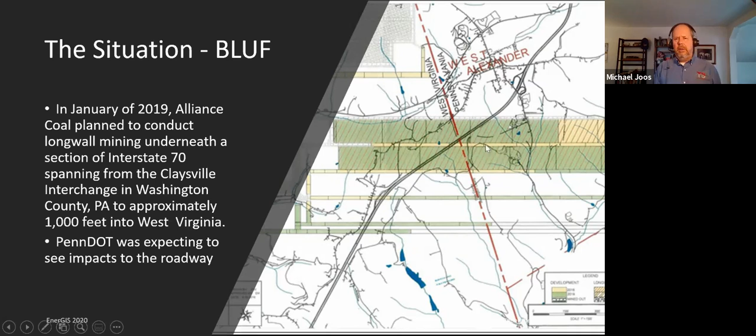And with this longwall mining activity going on underneath the interstate, of course, PennDOT was expecting to see significant impacts to the roadway surface. If we look at the image in the right-hand portion of our slide, this is Interstate 70 coming down from the northeast and proceeding to the southwest here. It does, in fact, cross the West Virginia state line right here. And the shaded green areas are referred to as longwall panels, and I'm going to touch on them in our next slide here, give you a little better understanding of what's happening there.

So longwall mining, which is the principal method of extraction that Alliance Coal uses in the Tunnel Ridge mine, they cut these longwall panels underground, and they're typically 1,200 to 1,400 feet wide, about 10,000 feet in length, and they are generally between 300 to 1,300 feet underground.

As they are cutting that longwall face forward, they have hydraulic roof supports or shields in place to protect the miners. And as the longwall face advances, the shield moves along with it. So what happens is the roof in the mined out sections behind the shield begins to collapse as those shields are moved forward. And that's where we see the impacts on the surface then.

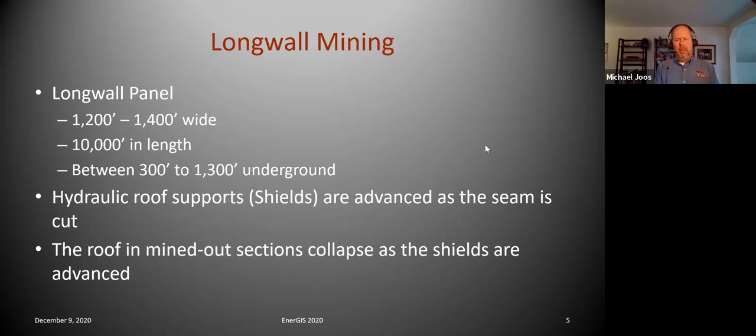Interstate 70 is a very heavily traveled U.S. interstate. If you're not familiar with it, it runs east to west from just east of Baltimore, Maryland, through the Rocky Mountains and terminates in Cove Fort, Utah. The annual average daily traffic, as I mentioned, very heavily traveled roadway, is about 34,000 vehicles a day for the particular stretch of highway that was involved in this project.

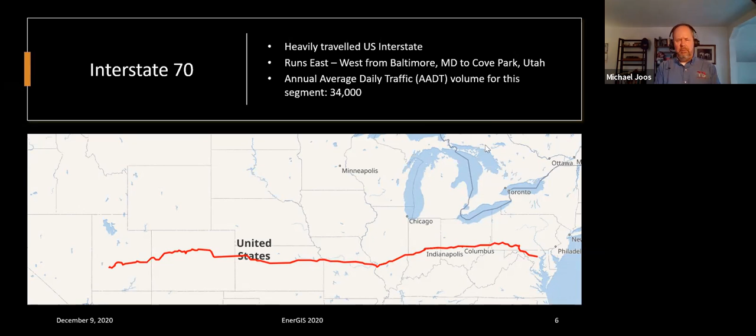The players at a very high level that were involved: the Pennsylvania Department of Transportation, District 12, again, they were our client. A gentleman by the name of Roy Painter was PennDOT's technical advisor. They brought in the University of Pittsburgh as a research contractor. Their principal investigator was Dr. Anthony Iannacchione. We coordinated very closely with Dr. Iannacchione throughout this project. And then finally, Alliance Coal, who owns and operates the Tunnel Ridge Mine.

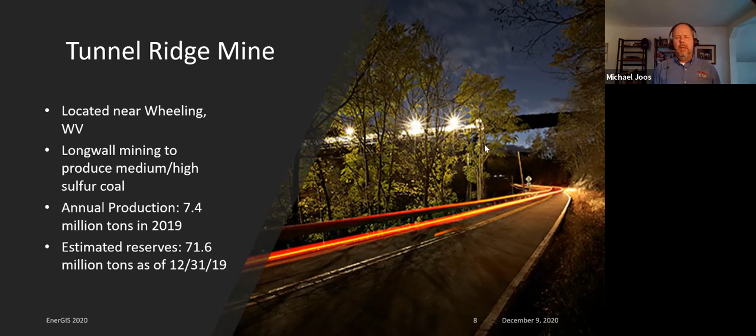A little background on the Tunnel Ridge Mine. This is one of several mines owned and operated by Alliance Coal. This particular mine is located near Wheeling, West Virginia. Longwall mining, again, is their principal method of extracting coal to produce medium and high sulfur coal. This is a significant operation with annual production of 7.4 million tons in 2019, and they have estimated reserves at the end of the year 2019 of 71.6 million tons. So still a lot of mining to do here at this particular mine.

The project timeline for panel 15, and that is the longwall panel that was going underneath I-70. They started panel 15 in November of 2018. They started under I-70 in January 2019, right around the beginning of the year. They finished under I-70 near the end of February 2019. So they were actually underneath the highway for about 2 months. And they did a full retreat, where they bring all the equipment back out of the panel, in May of 2019.

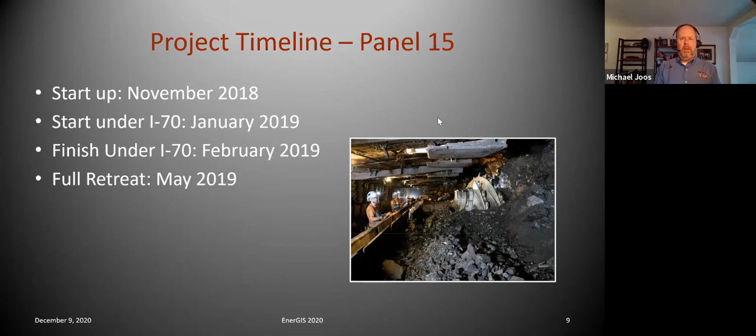PennDOT's objectives in this project, one of the reasons that they brought us on board for this, was to investigate the influence of longwall mining on highway alignments and associated slopes and embankments. So not just the road surface, but the slopes and embankments also. They wanted to evaluate how the highway deforms during the undermining. They wanted to utilize models to better understand subsidence impacts to highway alignment and better determine how highway alignments could be impacted on future projects.

So if you look at those last two bullets, you see that not only did they want to understand what was going on with this particular project, but they also wanted to have some really solid data to do predictive analysis on future projects, because while it's not something that happens very often, where mining is going underneath major interstates, it does happen from time to time. And in fact, it did happen here in Western Pennsylvania not all that long ago when longwall mining was conducted under I-79.

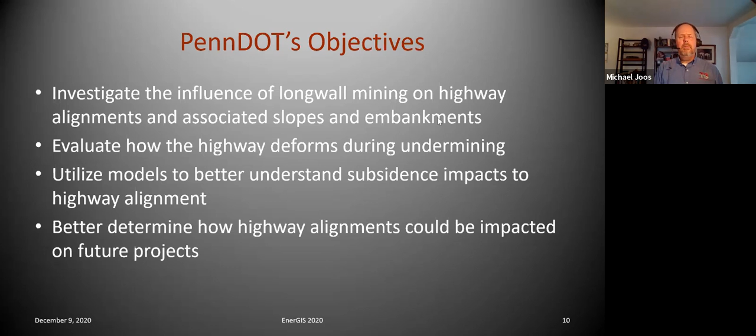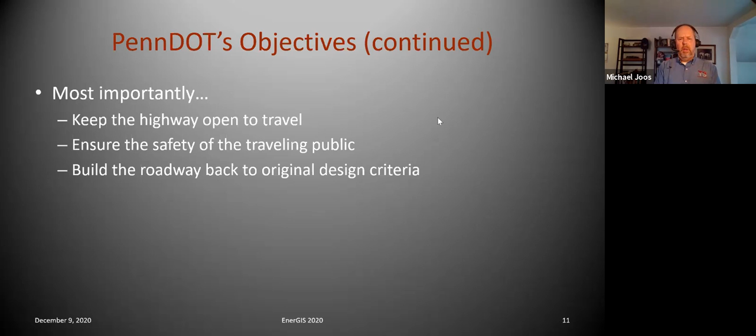Continuing with PennDOT's objectives, they also, and perhaps most importantly, wanted to keep the highway open to travel. And this is, to us, I think, one of the most fascinating aspects of this project. That stretch of highway, as I mentioned, 34,000 vehicles a day. They were expecting significant impacts to the roadway, but they wanted to keep the highway open to travel while this was going on. They also wanted to ensure the safety of the traveling public and then build the roadway back to the original design criteria.

PennDOT's expectation going into the project was that they would see settling in the vertical axis of between 2 and 5 feet throughout the time frame that they were underneath their mining. Also looking for horizontal deformation from compression, pushing together, and tension, pulling apart. And another interesting aspect was that they would not see the impacts of the longwall mining for about 1 full day behind the longwall face, or about 150 feet behind the face. So as the face of the longwall panel was advanced forward, they would not see the effects of that on the surface for about 1 full day. So I thought that was kind of interesting as well.

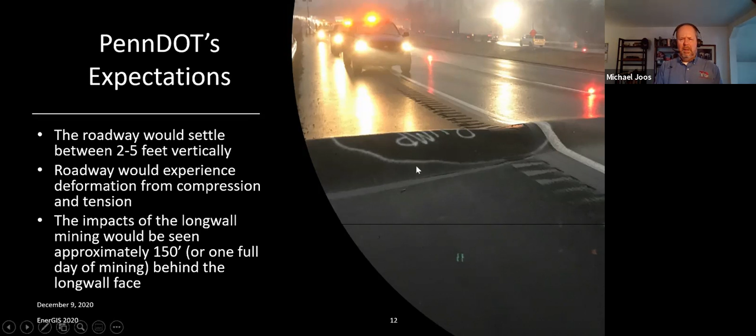This image on the right-hand side is one of my favorites when you're looking at some of the impacts to the roadway and this vertical roll here. We often see signs on the highway that say bump, but we've probably never encountered anything like this. It's easy to imagine that being well over a foot difference between the roadway surface and that roll.

As you can well imagine, this was news. It did not take a lot of digging on Google before we were finding all kind of newspaper articles and television news stories. And it was news not only because of the impacts to traffic and people's commutes and all those kind of things, but just simply because of what was going on, the project itself, that there was major mining activity going on underneath this very heavily traveled interstate.

Some of the roadway disruptions, this is what was going on. This is what we were seeing on the surface. And this was happening pretty much 24/7. And PennDOT was out there. You can see the traffic in the background, but they were out there 24/7 making real-time repairs to the roadway to keep that highway open. Again, that vertical roll on the left-hand side. On the right side of the image, we can see some horizontal, and in this case, separation of almost 3 inches.

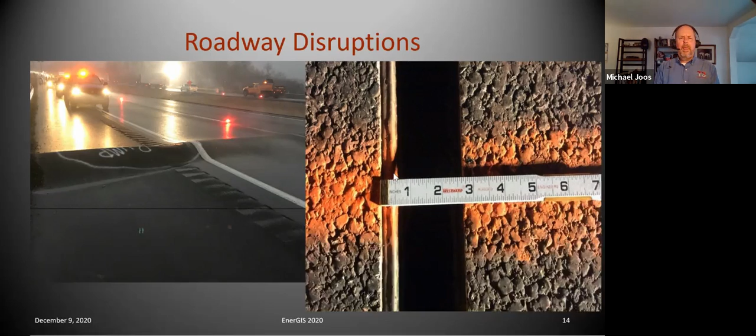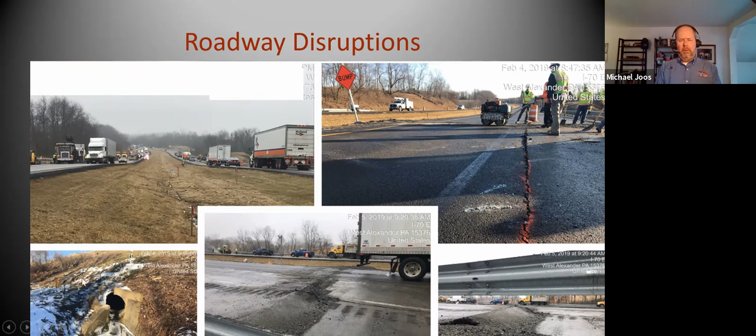Up on the right-hand side, we see some longitudinal cracking. Down here in the lower left-hand portion of the image, again, as I said, the disruption was not only to the roadway surface, but also to the slopes and embankments. You can see a culvert pretty much destroyed here. You can see difference in elevation from this section of pavement to the next. Over here, we can see cracking across the travel lane here in the berm, and of course, some very significant settling here in this image right here in the upper right-hand corner.

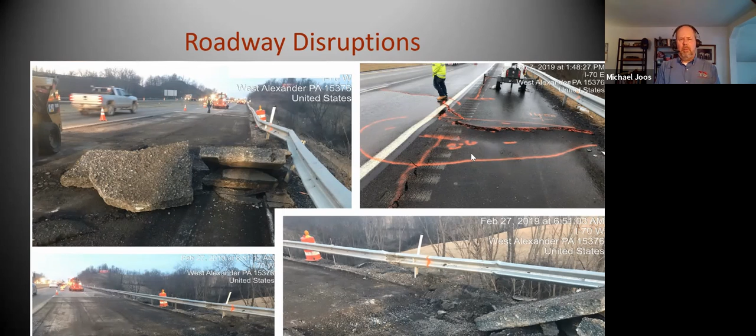So again, the roadway was being severely disrupted. PennDOT was out there taking care of these issues in real time, keeping that highway open to traffic. Pretty amazing. Our technical approach to the project was really driven by PennDOT's determination that mobile LiDAR technology blended with field surveys and photogrammetry from aerial imagery. So there's the data fusion part of this, is blending those different data sets to deliver the desired solution.

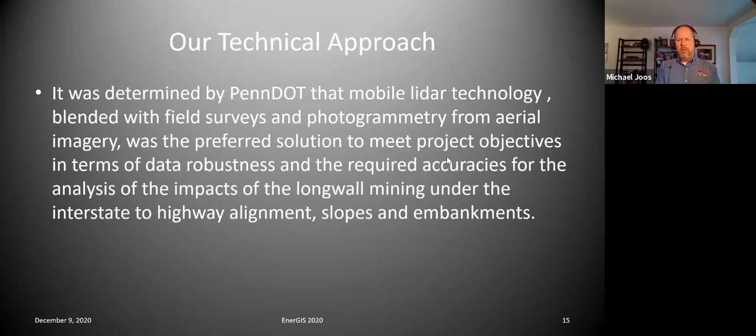But they determined that that was the preferred solution to meet project objectives in terms of data robustness and the required accuracies for the analysis of the impacts of the longwall mining under the interstate to highway alignment, slopes, and embankments. So with that in mind, we developed this technical approach, and just taking a quick look at it here, we established a primary control network that included benchmarks that at the time, and Marty's going to talk about this here in a couple seconds, we thought were outside the project area. We also established project control for the aerial imagery and mobile LiDAR.

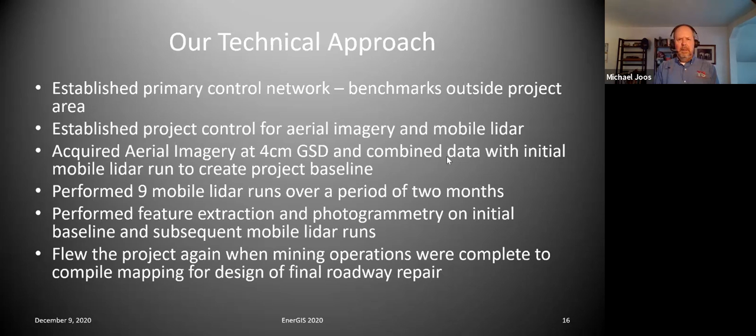We acquired aerial imagery from manned aircraft at a ground sample distance, GSD, of 4 centimeters. That's very high resolution, high quality aerial imagery, and combined that data with the initial mobile LiDAR run to create a project baseline. We performed 9 mobile LiDAR runs over a period of 2 months, performed feature extraction and photogrammetry on the initial baseline and subsequent mobile LiDAR runs, and then finally flew the project again when mining operations were complete to compile mapping for design of final roadway repair to bring it back to original design criteria. At this point, I'm going to ask Marty to jump in and talk a little bit more about the technical aspects of the project.

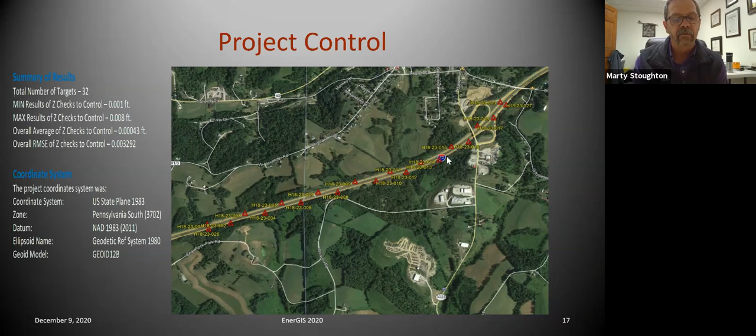Well, as Mike was talking about, on these monitoring projects, you don't normally want to use control within the limits of the possible disturbance. And on this project, the primary control was run from National Geodetic Survey monuments that were in the vicinity, but outside of the supposed area of impact. But during the course of the project, it was determined that some of those monuments were impacted by the mining too. And we used US State Plane NAD 83 coordinates in the Pennsylvania South Zone and NAVD 88 elevations for the control of the project.

And each time that we ran the mobile LiDAR system, the control was surveyed using static GPS procedures, and the digital levels were run from the primary control network. And we originally used the 32 targets for the baseline aerial and mobile collections, and the network had to be modified during the course of the project because of that road construction that Mike was showing you, and areas of major deviation that we needed to add some additional control there too.

But originally we were required to scan within 24 hours of the control being run. But once that mining started, we quickly noticed the need to start scanning as the control was being run, because that site was actually changing very rapidly. In some of the area, you could see a couple tenths of difference within an hour's time. But here, the summary results that you see on the page, that was from the original baseline scanning. And if you look at that overall RMSE value, that's very tight data that we were collecting out here. Next slide.

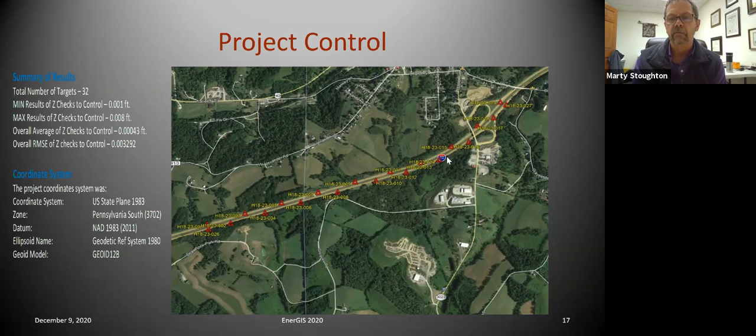But these mobile LiDAR systems have been used in surveying for more than a decade. And most of our survey equipment manufacturers now are offering these systems. And I'm talking about like Topcon, Leica, Trimble, and Riegl, just to name a few of them. And there's a number of configurations with single or double laser sensors, different cameras, and other add-on components, depending on what the project needs are.

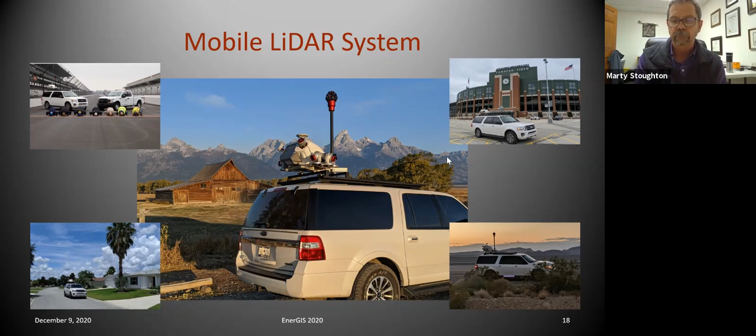But the components from these systems have been around since the 1960s, and the early positioning systems, similar to what GPS is now, tracked ballistic missile locations around the world, and lasers measured the distance to the moon in the 1960s very accurately. After the Apollo moon landings, they left some reflective equipment up there, and they got a really tight distance from the Earth to the moon. But the heart and soul of this system is the measuring head with the GPS and IMU. That inertial measurement unit is made up of accelerometers and gyros that update positions over 200 times a second. So we're getting really tight data.

But we also, in conjunction with the camera systems that come with the system, again, we use the Ladybug to go with those planar cameras. And all those images are registered to the point cloud you collect, and they can be used to colorize the data if it's needed. Next slide, please.

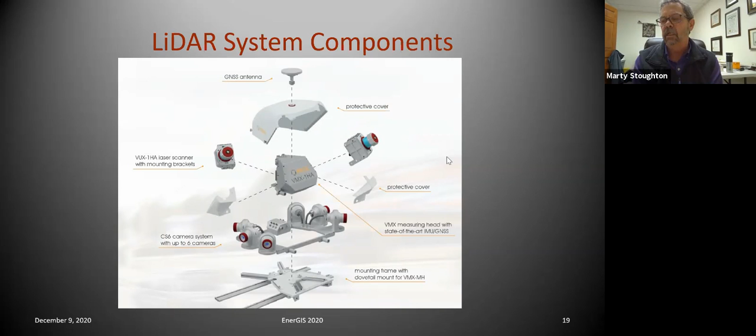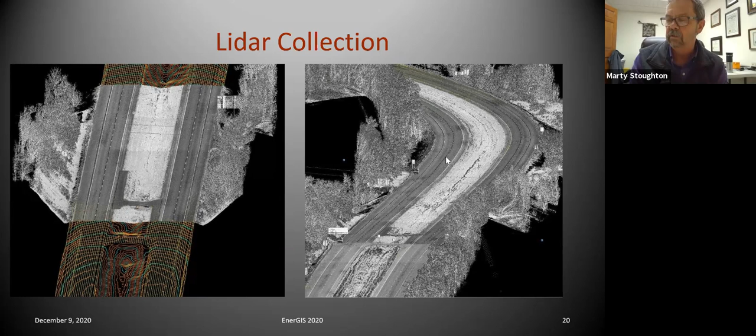But the data was registered and processed to the control, and then the data was cleaned and classified and readied for the mapping and extraction. And that photo on the left there is showing the DTM and the contours under the LiDAR data that was collected. But PennDOT did a great job of keeping the road surface clear for the scanning, because these systems don't really work well when the pavement's wet or snowy. Next slide, please.

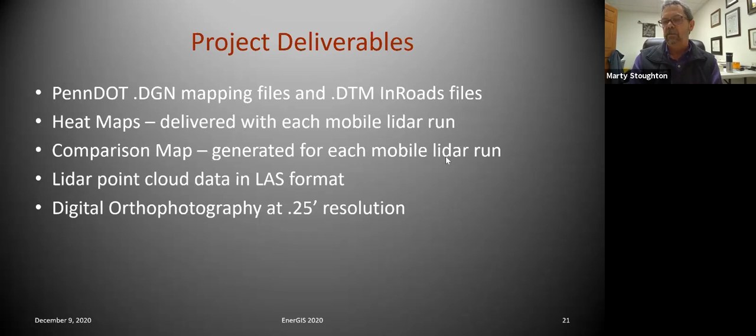But just some of our project deliverables. Again, the MicroStation DGN file was at PennDOT specs and standards, and the DTM was created with InRoads. But we delivered heat maps with each of those mobile LiDAR runs, and we generated those comparison maps also. The LiDAR point cloud data was provided in LAS format, and the digital orthos were delivered at 1/4 foot resolution. Next slide.

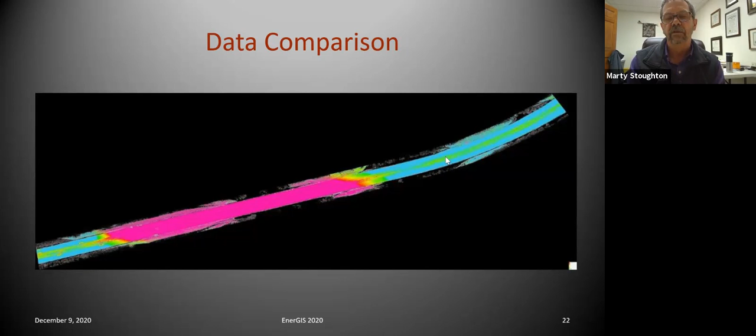But just showing some of the data comparison, and this is actually change detection techniques that we're using here. And that magenta or fuchsia, depending on what color you see, is where the data moved the most out there. And we're going to see here in just a second, but next slide. And this is really telling that between drive 1 and drive 6, that roadway surface moved over 5 feet. And that's a lot. You could see the stuff that Mike was showing in those pictures earlier with the kind of destruction that was happening. But when the whole roadway surface dropped, you couldn't see it with your naked eye, but you definitely see it in the data.

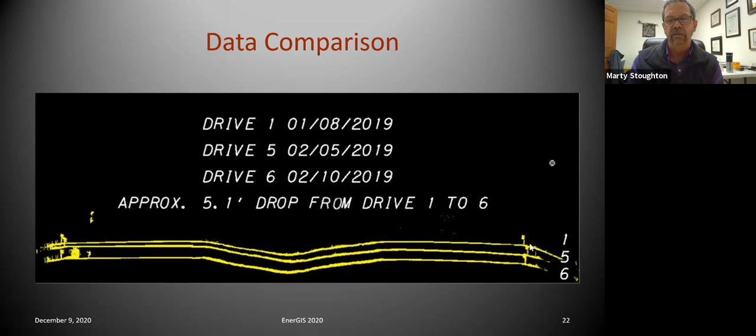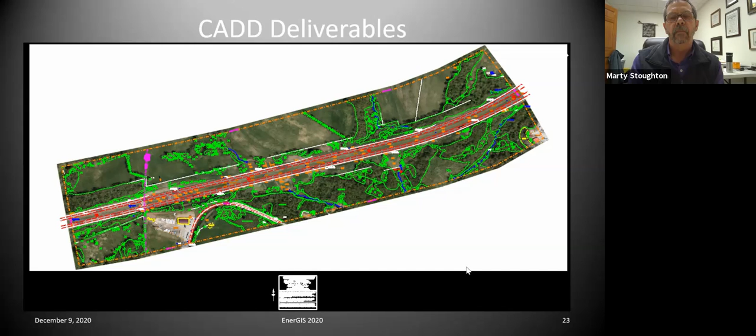And Mike was talking about the monitoring of those slopes too. And that's what all these posts were put in for, to help monitor those side slopes, because some of this, you'll see just a little bit, you couldn't actually see with the mobile LiDAR. But the line work, the DTM, this is what was generated to create a surface for the engineers to design their new road surface. Next slide.

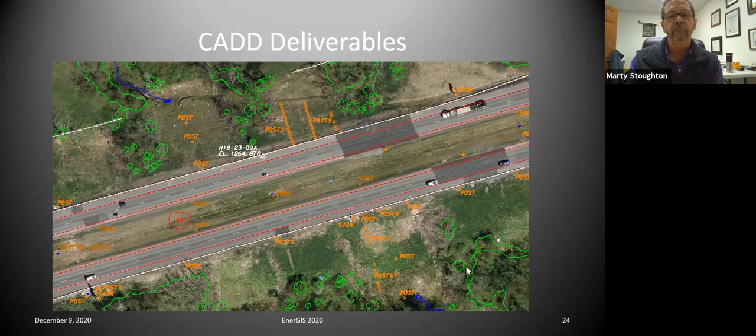Okay, I'm going to jump back in here. You know, when we were outlining our presentation, we said that we would wrap up with the results. Did we solve the client's problem? And so this is from PennDOT's perspective. This is what they told us after the project.

So first off, the roadway behaved as expected during the longwall mining operations with regard to movement in the vertical. So pretty much did what they were expecting it to do. The horizontal shift, or what they call the wave, was a little more difficult to measure. And in conversation with the University of Pittsburgh, they determined that further experimentation would be conducted to better understand those

impacts on future projects. So that's kind of interesting, is even with that incredibly dense data set that the mobile LiDAR was giving us, they still found it just a little bit difficult to measure in the horizontal wave. The technical approach to monitoring the roadway during the 2-month period delivered the desired results. And then finally, based on the delivered mapping, the roadway was in fact built back to the original design criteria during the summer of 2019.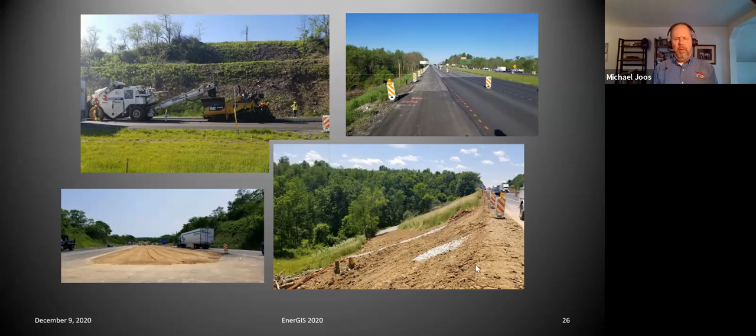And I want to share just a couple of quick videos with you. Full disclosure, these are not the I-70 project. This is in fact a project up near Scranton, Pennsylvania, Interstate 81 and 380, the interchange there. We did this for PennDOT, delivered it just a couple of weeks ago. Marty and his company collected all the mobile LiDAR for us. We did all the feature extraction and the photogrammetry.

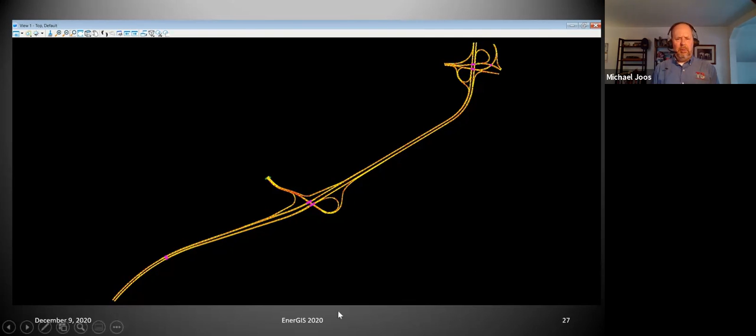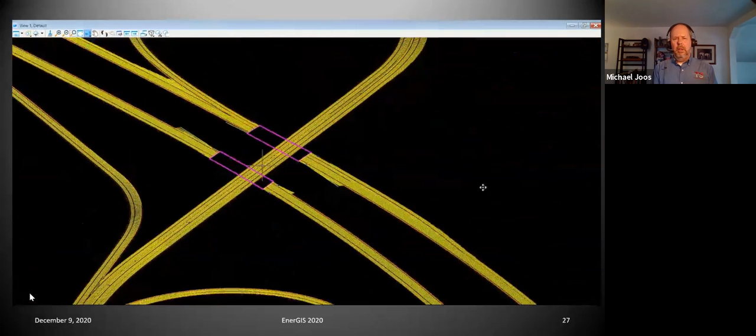This is an example of the mobile LiDAR technology, feature extraction, data fusion, blending that with a photogrammetric data set, and just to give you some idea of what that looks like. From the mobile LiDAR, our focus was to collect from road shoulder to road shoulder. So anything off of the shoulder, any kind of infrastructure, light poles, utilities, we did not collect from the mobile LiDAR data. Everything outside of that within the right-of-way was collected through photogrammetry from aerial photography.

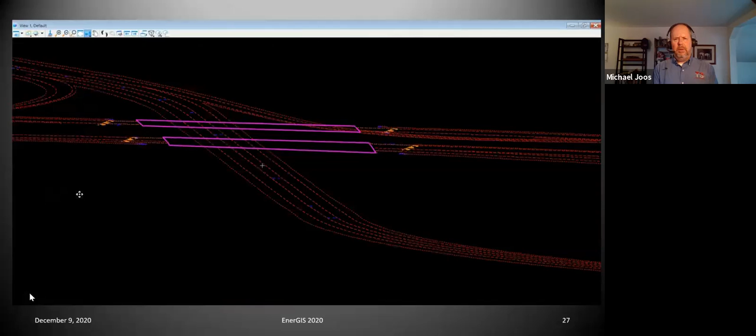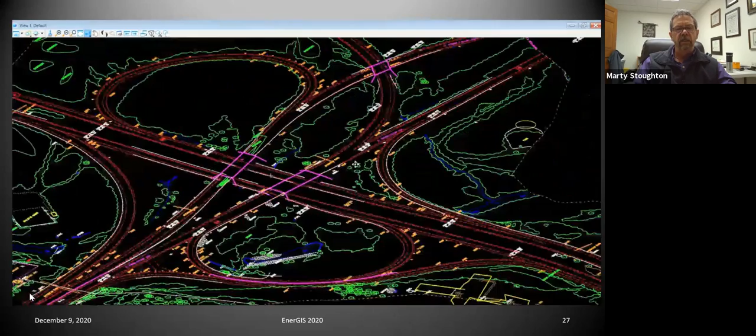All of the vector data collected from the mobile LiDAR is also breakline data to support the DTM. You can see bridge decks there, catch basins, all those kind of things. Now we're blending the photogrammetric data as well. All of this is done to PennDOT specs. And Marty, if you have any comments on this, please feel free to jump in. Well, these applications, the assets also, we were talking with GIS applications, we do a whole lot of asset collection and inventories for GIS systems with mobile LiDAR.

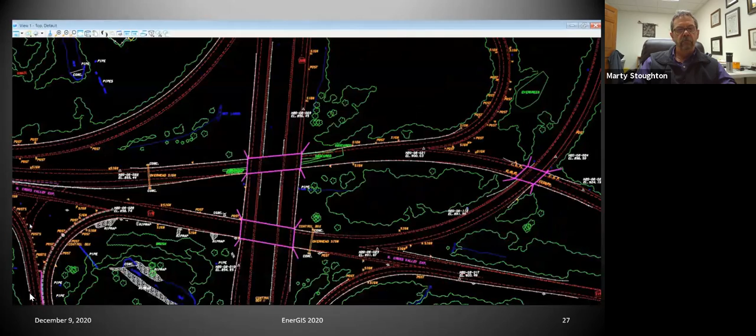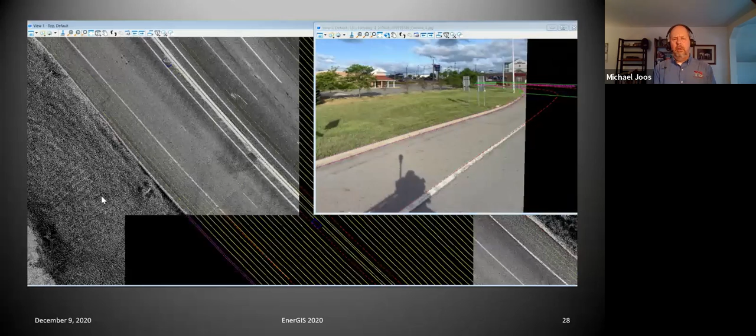One more short video, just to give you a different perspective. And this gives you an idea of the imagery that's being captured by the mobile LiDAR system. You see the vector data capture, top and bottom of curb, paint striping, all those kind of things. So an awful lot of capability from these systems. Seeing it in profile now with the top, bottom of curb.